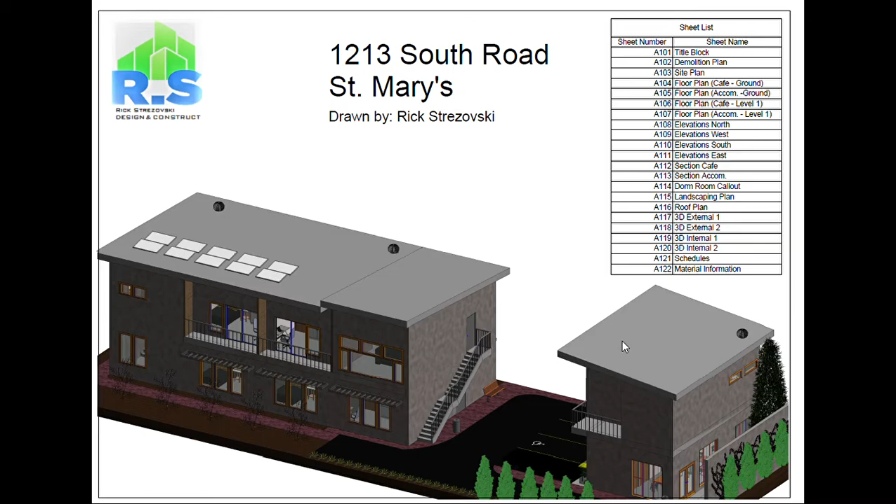So the proposed new buildings add up to the same area approximately as the previous buildings that are to be knocked down. Also, asbestos has been identified in the eaves and floor coverings, so that's obviously something that's going to have to be removed by somebody licensed before any other demolition work is to take place. If you look in the safety file, I also have a file on the safe removal of asbestos.

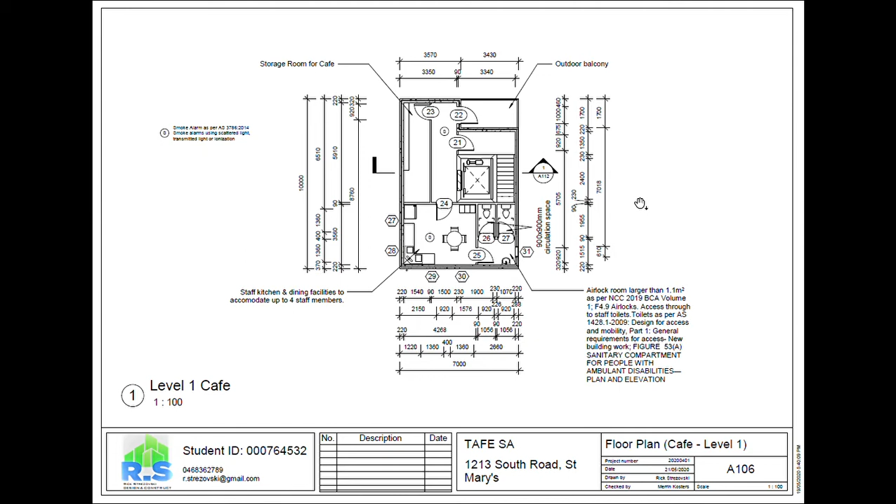So the reason I had the cafe at the front of the build, I guess it's beneficial for a business to be closer to a main road, more exposure to the public. However, I guess there is a negative. I'll just go to the ground floor. A negative being so close to South Road, but that's why I've put this precast wall here to protect from the noise and the pollution, the traffic on South Road. If you check the landscaping plan, which we'll get to, you'll see there's a few trees in front of it as well to also protect the building a bit more.

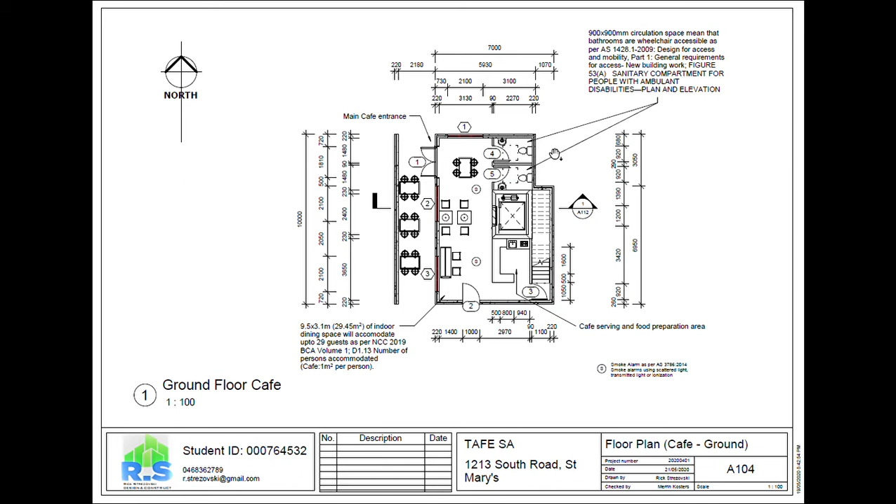The student accommodation, as I mentioned, the entry is at the rear of the building, so it's somewhat removed from the main road, so unless you're living there or know someone living there, it's not going to be very easy to get onto the site and get into the building. A bit more privacy. There's also a bike storage area near the entrance just for convenience. Each dorm room is 15 metres squared, as per BCA Volume 1.

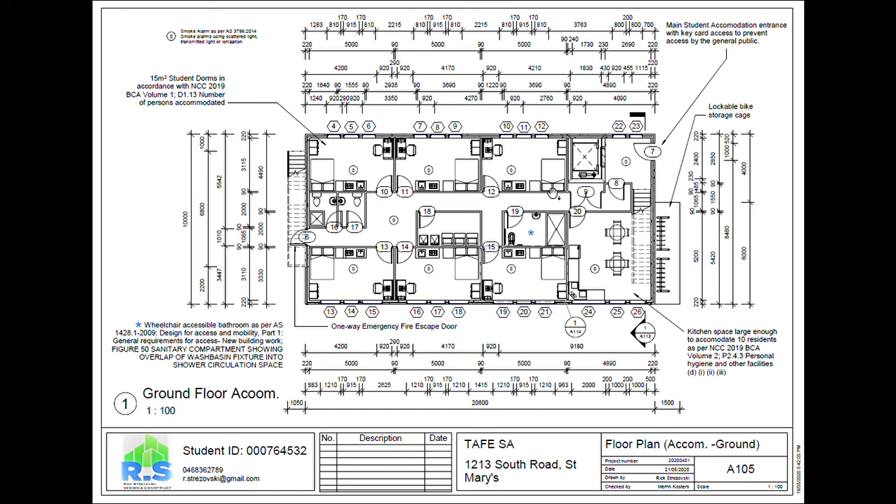There is also a larger disability access toilet on the ground floor, but also on the upper floor, as well as a couple of extra toilets there, shower and laundry facilities. Again, there's a lift to get up to the next level. A large kitchen space that would accommodate the residents.

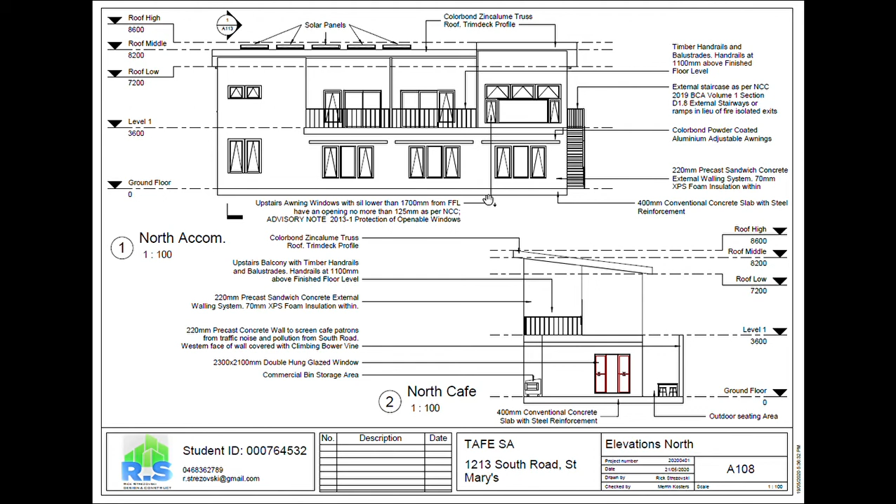There's also an external staircase, fire escape, which you can see here. I didn't mention that all the doors and all the bathrooms and the toilets, they're all wide enough for wheelchair access in both buildings. With the lifts, it makes it a completely wheelchair accessible build.

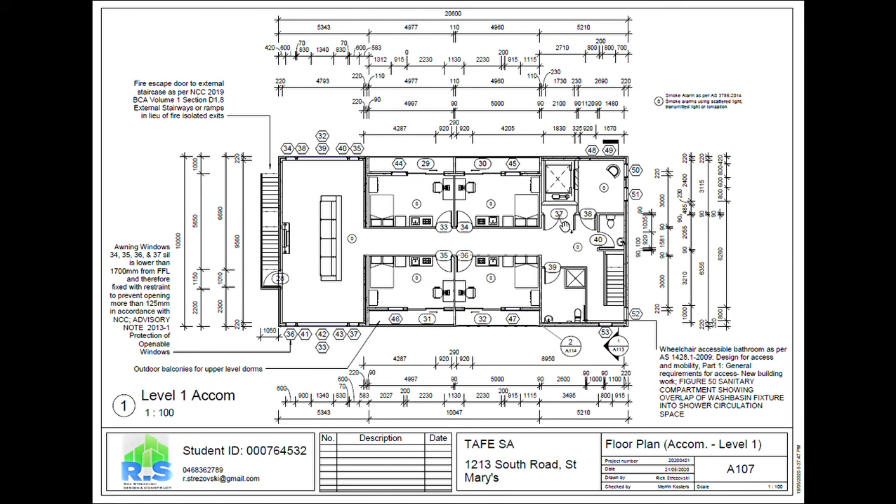The materials that are being used for both buildings: the external envelope is 220mm precast sandwich concrete panels. So within them they have XPS foam, 70mm of it, which brings the R value of the walls to 2.8. There's also these aluminium Colorbond powder coated awnings on the lower levels, obviously a bit of sun and shading protection for those dorms.

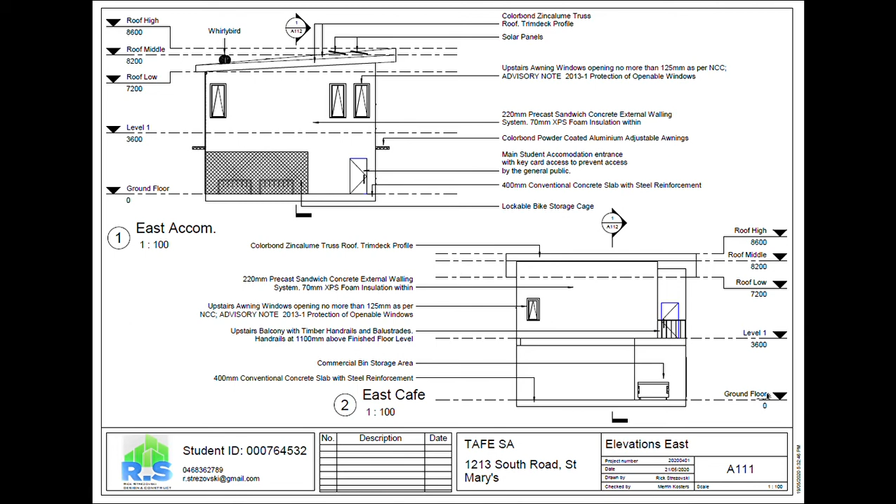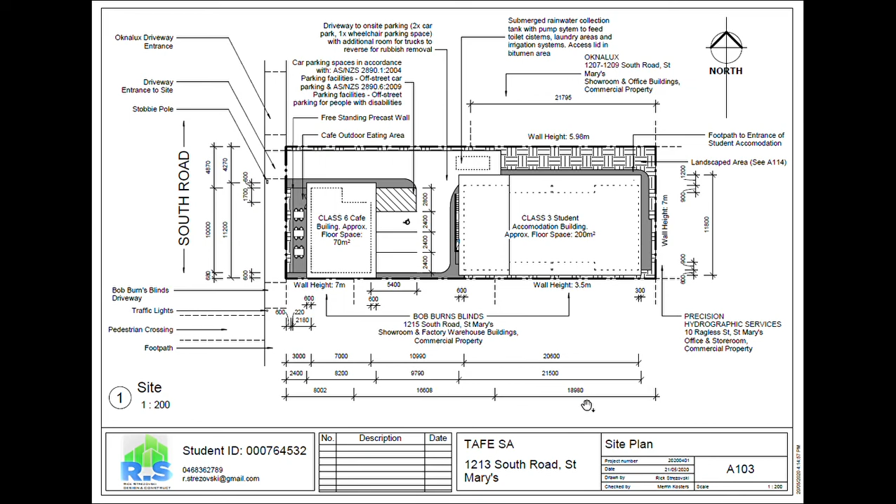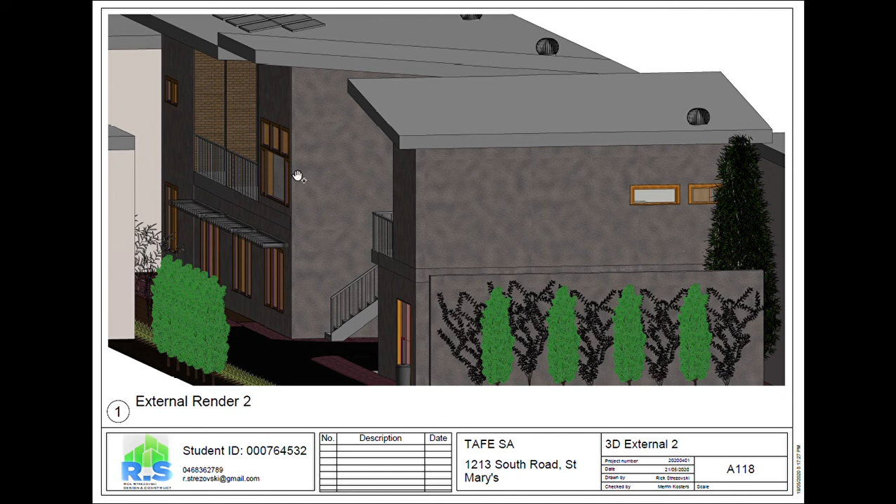So natural light is another one, big large windows, which if you have a bit of a closer look at the schedule, you'll see there's a lot more lighting than is required in the rooms. All the awning windows as well, double hung windows, create a lot of natural ventilation. The sliding doors on the upper level dorm rooms, just off the balconies. The insulation, as I mentioned, was R2.8 for the XPS foam in the external envelope of the building, and in the ceiling space it's R6 insulation batts. There are also solar panels. That's obviously going to help with the power consumption of the build.

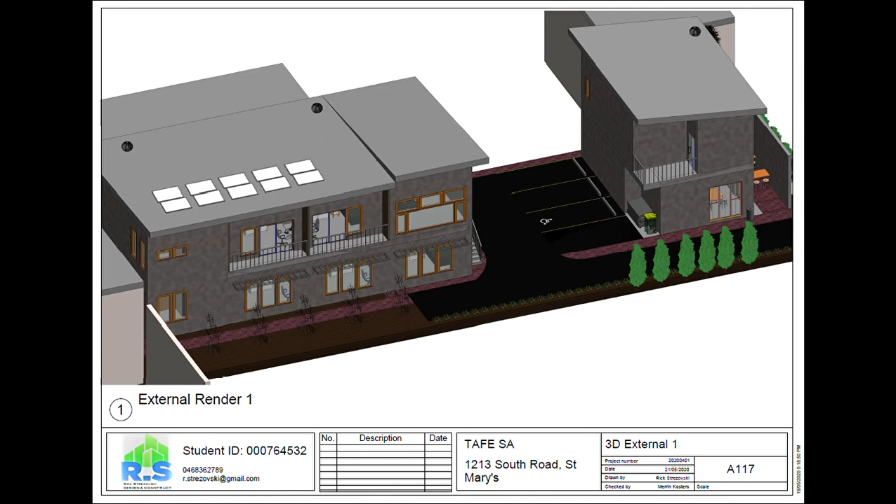So these are just a few external renders. And as I mentioned earlier, that's the trees in front of the wall blocking on South Road. So if you just have a bit of a look through the proposal, I hope you like what you see, and I look forward to hearing your feedback. Thanks.